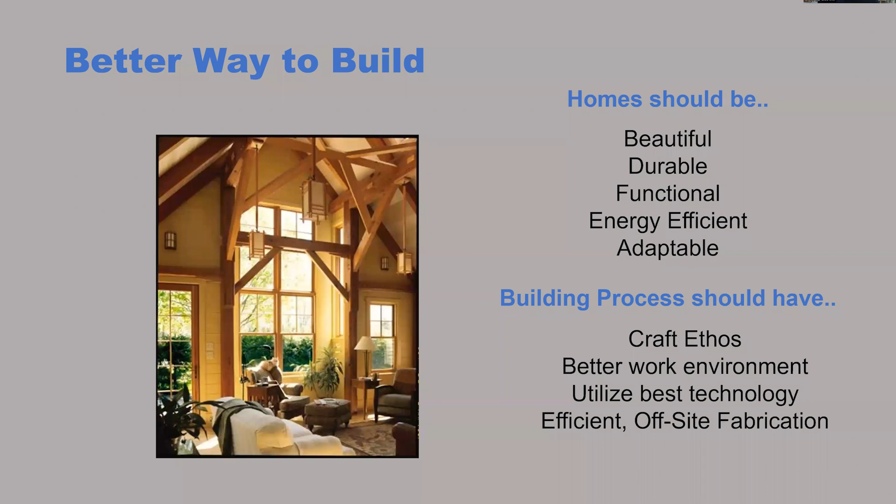Of course, the other part I was interested in is developing a process of building that would contain that craft ethos and a better work environment, and utilize good technology, focused on efficient off-site fabrication, as we were from the beginning. It was the practical way to approach timber framing.

But I ran into trouble in those early years of reviving timber framing, as we were calling it, because we had the task of developing new enclosure systems. The ones used in the houses in Walpole and Concord really couldn't work because they were infill systems between the timber structures, and that was not energy efficient or labor efficient. So we went about the task of creating new enclosure systems.

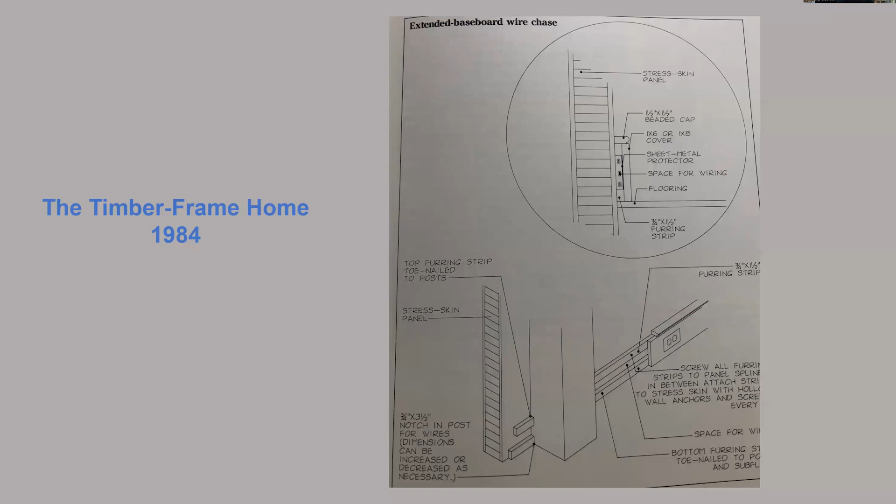So about this, this was in 1984. We got a little bit smarter about it. This little innovation happened on my own house, where there's an extended baseboard that is on the inside of the SIPS panel. That allowed the baseboard to be accessible, run on the inside. You could easily change outlets or add wires if you needed to, and it disentangled the wiring from the wall system, which was really, really important. It was a big innovation at the time, or it felt that way, and it was the beginning of being dedicated to the concept of disentanglement.

So in 1989, on my reading habit, I bumped into an amazing book called Supports, written by John Habraken. I hope you can get a copy. It's not always easy, you can get it from the MIT Press. I think it's still available. If it is, get it. It's one of those books where I think I underlined more than I didn't.

It was just incredibly illuminating, and it led to my getting in touch with John Habraken, who happened to have been the head of the architectural department at MIT for about 7 years, but he was still in Cambridge at the time when I discovered him. So I was able to go down and meet him. We became fast friends. It led to John giving several seminars to our company on open building and dimensional coordination, and changed us for sure. So I'm indebted to John.

And just, I think maybe a year later, or it might have been 2, Stewart Brand got in touch with me as he was writing and then finishing his book, How Buildings Learn. So I had the opportunity to communicate with Stewart during that process. And once again, there's another book that was just incredibly influential in our work, and the two overlap, and they relate to each other in a way that it's just amazing, and it led to many of the developments that we went on to pursue as a company, and I'll try to describe it.

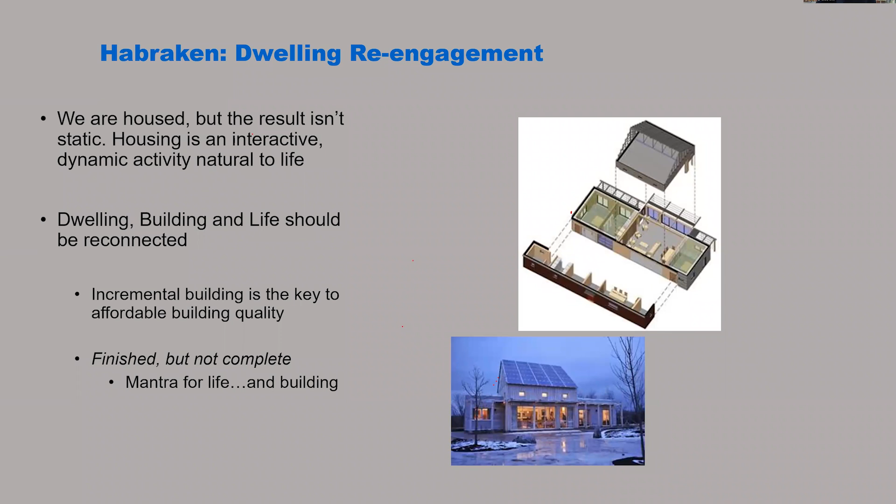So this is a Habraken principle of separating the shell from the infill. The shell is the longer term part of a building, and the infill is a shorter term part. But he makes the point that the shell is also the part where you want public control. There are regulations there, it needs long-term durability, and because it is a public proposition, the players should be architects, engineers, and public agencies that are helping to actually legislate the safety and durability of it. But the infill really should be private.

There should be more freedom there. It should be easy to change and modify. And the players impacting the infill part should be the inhabitants themselves, maybe interior designers, other semi-professionals who are helping the inhabitants keep up with the changes in their lives and personalize it for them, kind of make it their nest.

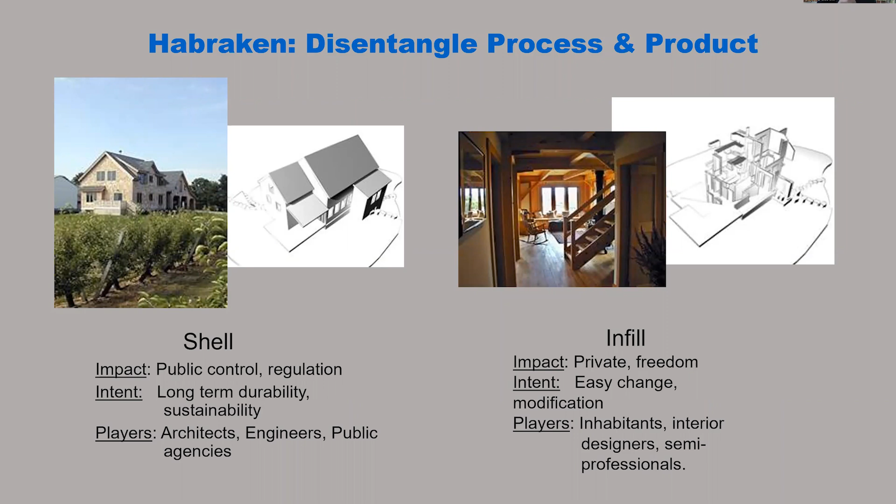So Brand, in his book, had this concept that is called the 6 S's. And the 6 S's are site, structure, skin, space plan, services, and stuff.

So the site is obviously geologic time, and things should last a very long time because the site is permanent. And therefore that work that we do as architects and designers of placing a house on the site is some of the most important work we do, because the site is permanent.

And the structure really should be, in a better world, always a 200 to 500 year proposition. And so that includes the foundation, the framework, and the engineering that makes it that solid.

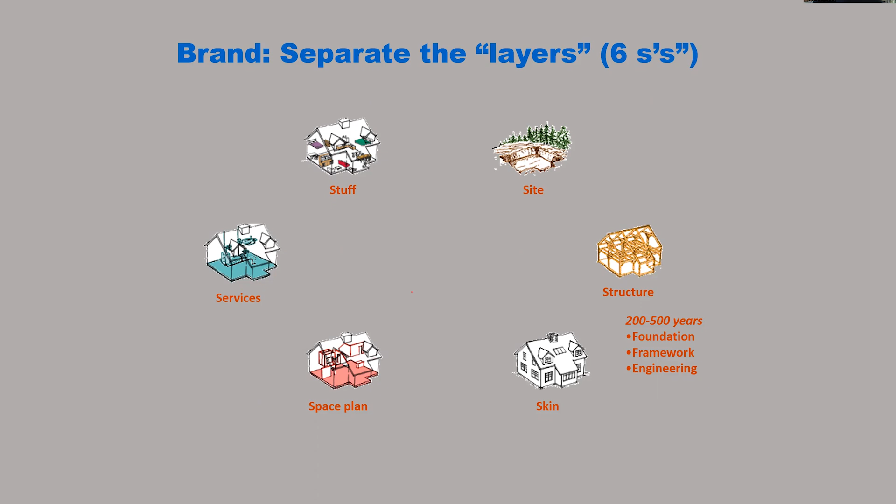The skin is shorter time, maybe 75 to 150 years. And there's building science involved with that: the roof, the walls, the windows and doors, the siding and the trim. I think we're doing better with rain screen siding to make that easily adaptable and changeable.

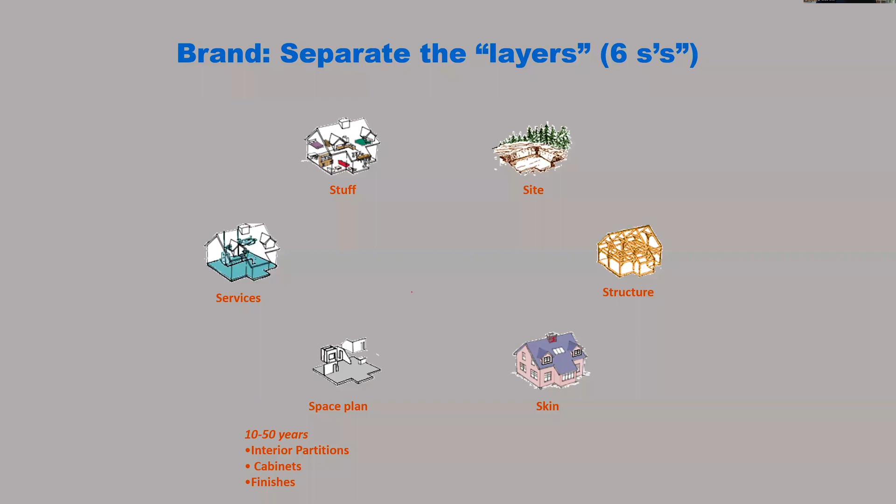And then the space plan, that's how the building is organized, is even a little bit shorter. Let's think of it as perhaps generational. So that's the interior partitions, the cabinets, and the finishes, with a shorter lifespan. And then services, we'll call this 1 to 10 years.

Plumbing, maybe the backbone is the drainage system, lasts longer of course, but the distribution changes when a bathroom changes or when a kitchen changes. So that's a shorter term thing. And the HVAC and electrical, network audio, those are all shorter term elements.

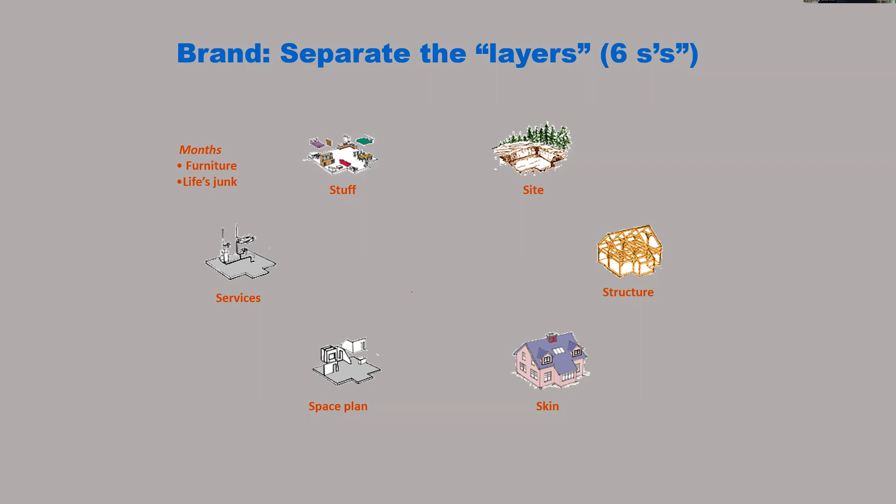And then we get down to stuff, furniture and life's junk that just changes, almost daily sometimes. So I love that concept. And so we put the two together, kind of Habraken's shell and infill and Stewart Brand's 6 S's, and push forward with that.

That's not a place where you should save money. And as builders, we've got to stop even saying this thing about my clients would rather have a granite countertop than more insulation. It doesn't matter. What they need is more insulation and better structure, because generations from now, that will matter, even if it doesn't matter to that first inhabitant. So that's just a paradigm that needs to be changed as soon as we can change it.

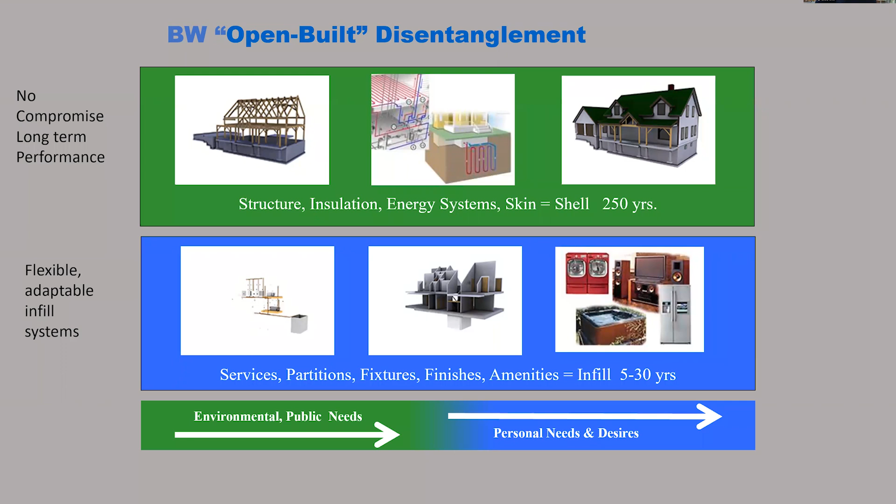And we have that should be personal and adaptable. And if we build the building right, we can accomplish those two sides, the shell and the infill, and then allow all those 6S systems to be disentangled and accessible from each other.

So how does it work in practice? Here's an actual project of ours, and our thinking about site and structure. Of course, this is us, so there's timber frame in there, and skin, and then space plan on top, and services and stuff, the furniture and so on.

If we think about that on the design side, we can develop strategies and systems to ensure that disentanglement is real. Because if we don't do that, if we entangle the services on the right-hand side with the structure on the left-hand side, then the life of the structure may be dependent on the life of the services. If we start cutting through structure to run pipes or ducts, you're halfway to demolishing the building by the time you get it built. We really shouldn't be doing that.

Think of having 110 voltage wiring in the middle of a high performance wall system. How adaptable is that? How changeable is that? And if we really expect that a building is going to last 250 years, that short-term wiring should never have gotten into that long-term structure system.

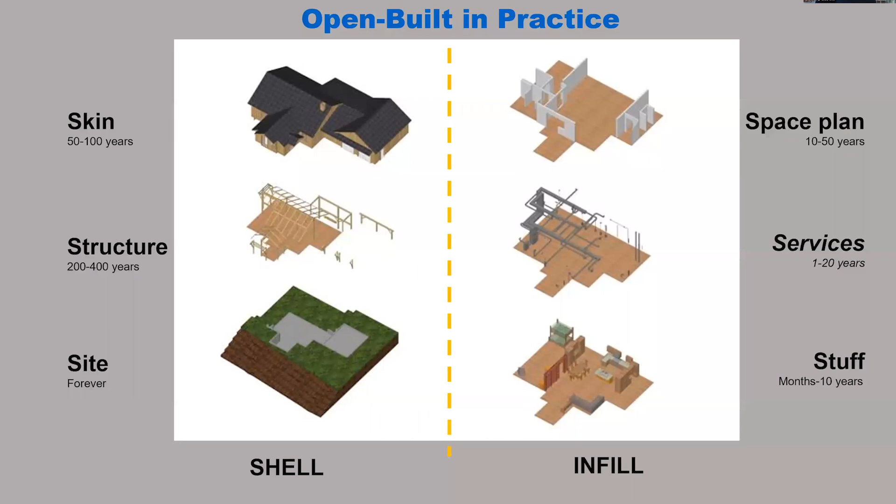So it's a principle that if you follow it and believe in it, solutions will come. We embarked on this path deliberately, with vigor, to develop the concept of how we could improve and develop systems for open-built disentanglement. It led to a series of projects we got involved with in order to do that.

I'll tell you about one or two of them. We developed a partnership with MIT for this purpose and some other partners, and that led to the open building prototype. We did two projects in that partnership, in 2006 and 2008.

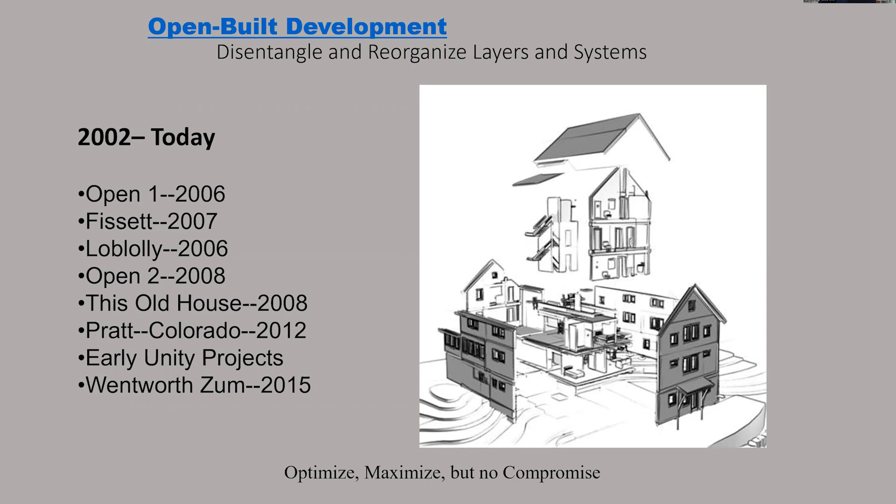We did the Loblolly House in 2006, a private house for a professor from UMass who believed in the vision too. In 2008, This Old House was another project that we pushed and pulled on our prototyping. Then the Wentworth Zum that we took to Greenbuild, most recently, in 2015, and a lot of prototyping in between. But as an example, here's one of the first prototype projects we did with MIT.

The project was actually a two-family halfway house in a brain injury rehabilitation center at Crotched Mountain. Given the clients, this building had to be extremely adaptable because the clients who lived in the halfway house were constantly changing with constantly changing needs. So the rooms actually had to be movable, and all the systems needed to be upgradable as needed.

Elements here that we developed: one was this mechanical core wall that had all of the intensive mechanical systems built into a central wall. The whole concept of this wall developed, or kind of redeveloped, from a similar concept that was developed in Germany. That whole core wall could actually be removed from the building and replaced with upgraded mechanical systems. It actually passes right through the center of the building and up into the roof system.

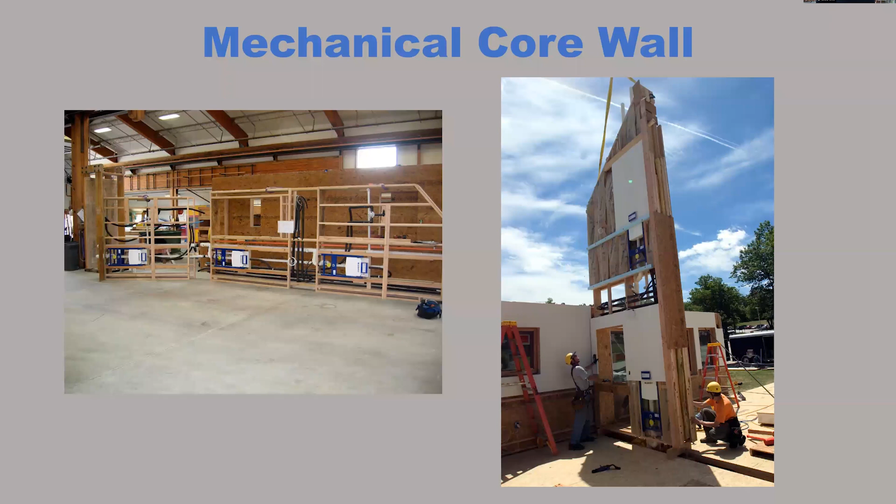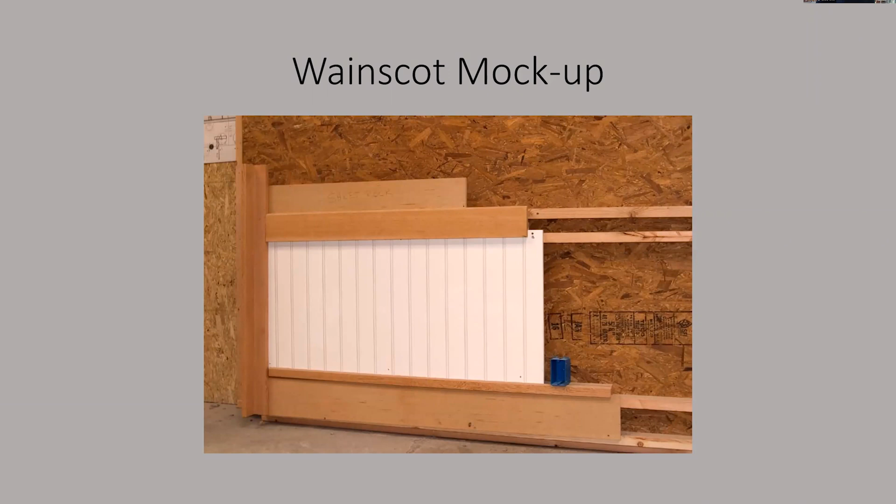We developed this wainscot system that has wiring behind it on several levels, and the wainscot is completely removable. There's that upper cap that you just pull off, and then the wainscot itself can be easily removed, exposing that entire space for changing the mechanical system.

We developed a demountable partition wall for that system, because all those partitions in that space needed to be able to be removed when necessary—not if necessary, because clients were changing.

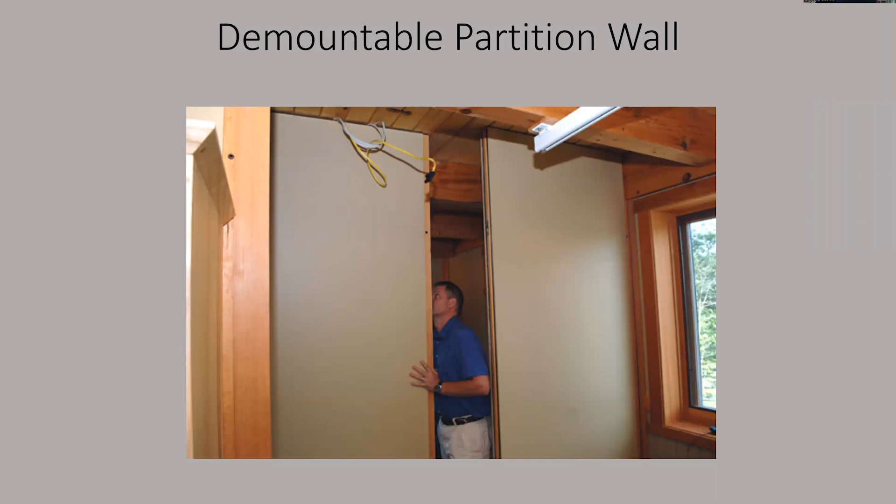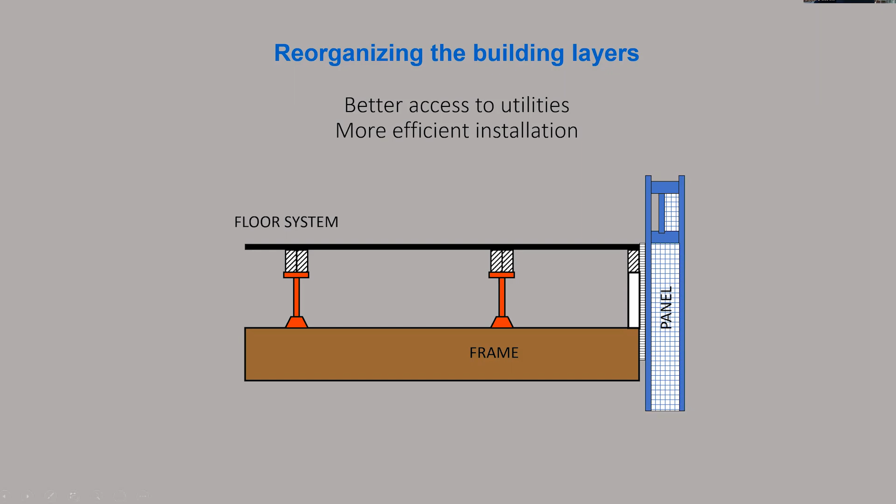We developed a floor system that could be placed kind of over a timber structure, and the floor system separated the mechanicals from the structure. All we had to do, once we had developed this—which was a brilliant system, by the way, and I take no credit for it other than arguing a lot, but it was developed by some good people in our company and continues to be developed today.

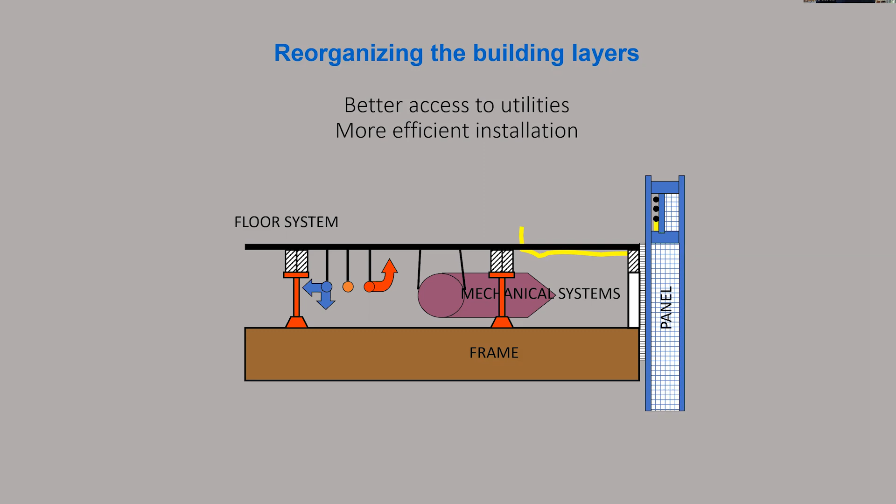With this system, you have open access to all the mechanical systems, ducts and pipes and wires. Here's ducts and a radiant heating system attached kind of in that floor system area. And then we developed a ceiling system.

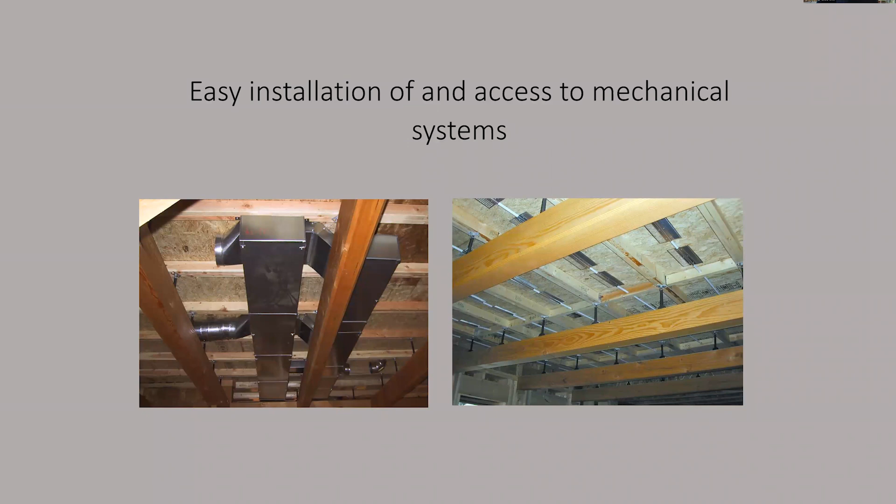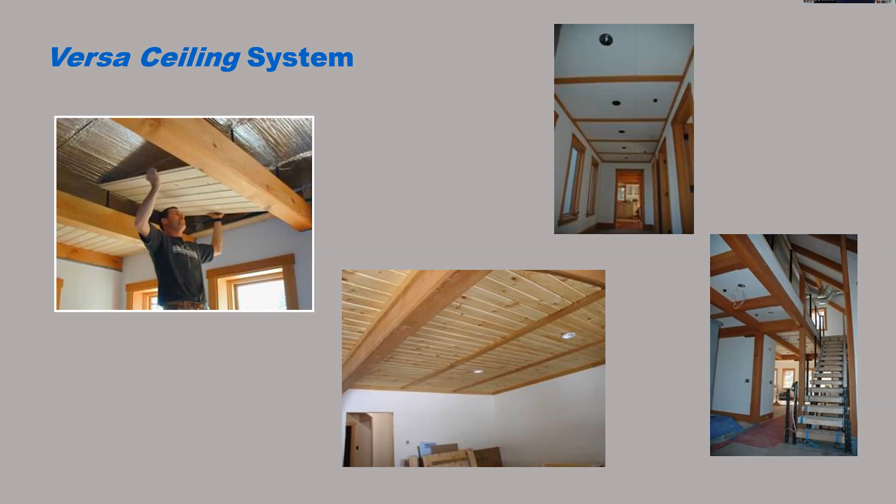We developed a ceiling system that was demountable. We just created these ceiling panels in our shop here, actually right behind me, and then we could take them out and install them kind of as a removable ceiling panel system over the timber structure. We've done that system in probably hundreds of houses, often with pine boards or something similar, but sometimes with MDF, as you see on the upper right there. It's a system we still use today, the Versa ceiling system.

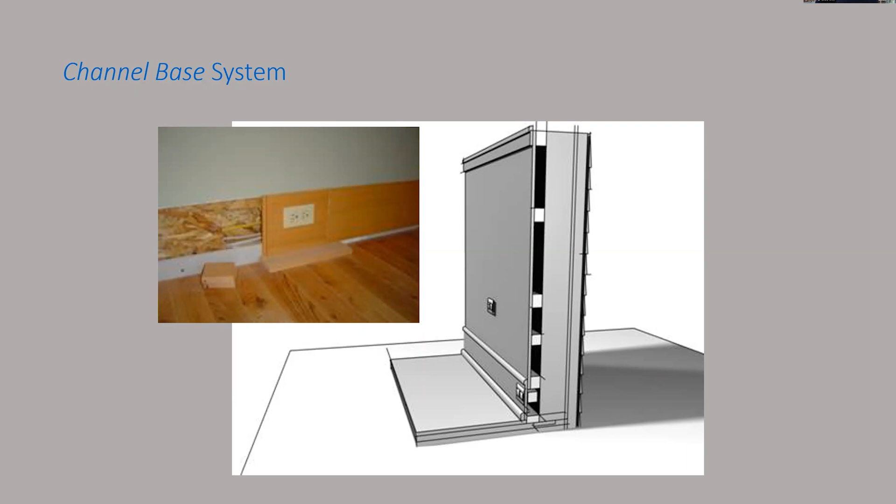And here's a channel base. We went on from the system that I developed in my own house to perfect a baseboard system that we've used in many, many houses. Part of the innovation is to ensure that baseboard is easily removable with a cap, and then separate elements for the outlet boxes, so you can move them easily. I have several of these in my house, and I've moved outlets to be closer to the lamp instead of extending cords further to the outlet. So there you can see that outlet box concept in a little more detail.

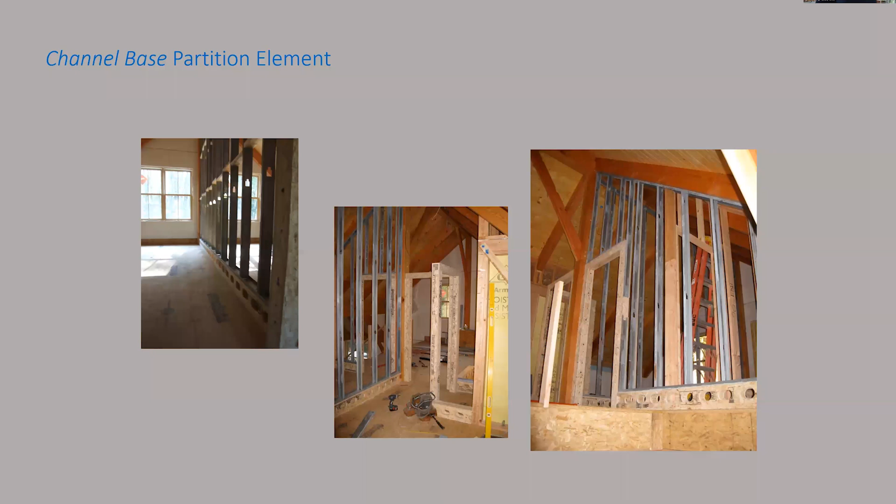For interior partitions, this is something we've experimented with. It hasn't become mainstream for us, but it's a base element we can use on our non-structural partitions, so we're able to run wires freely through that base element, up into switch boxes and outlets as necessary, while providing easy access to that base element.

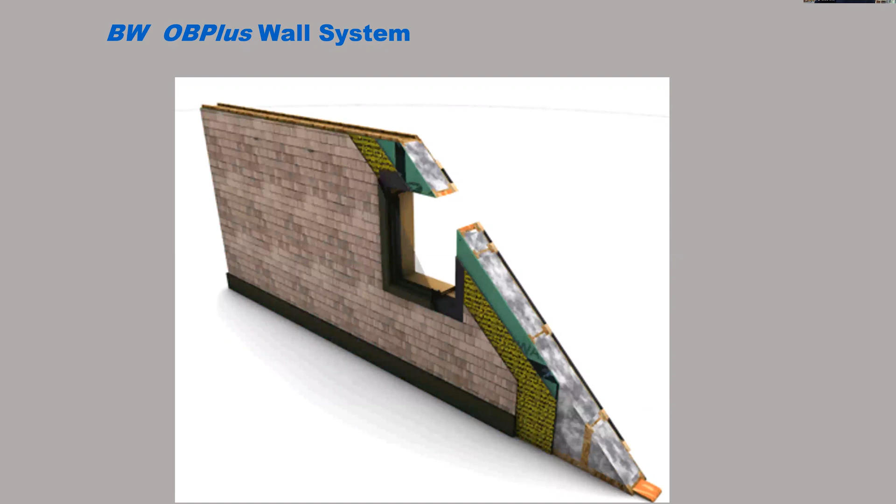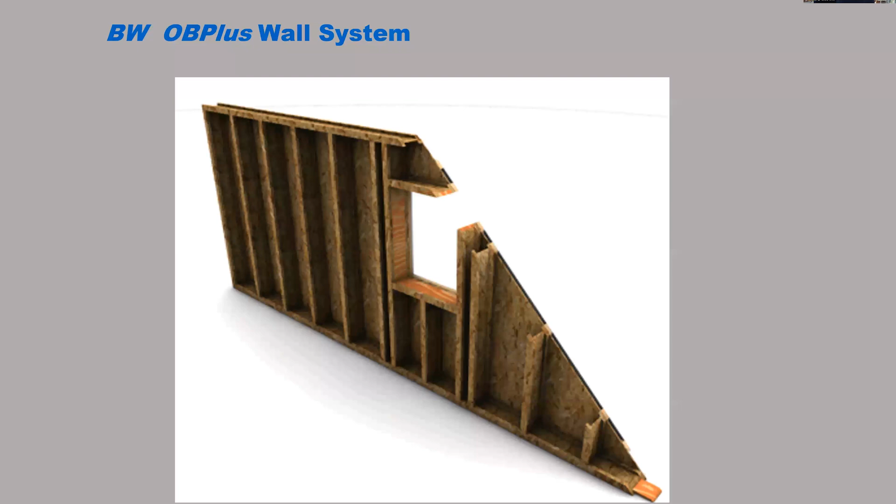In 2007 and '08, we developed what we call the OBPlus wall system. When we stopped using SIPs and developed our own wall system, one of the most important ingredients was ensuring we had a way to flexibly move wires and pipes. So there's a complete service layer in this wall system that's critical to how it functions. All the wall systems we offer today have that service area as part of the system, and it's really important. If these buildings are going to last a long time, and we've got R35s, R40, and R48 in the wall systems, to entangle it with services and wires is just a crime and would limit the life and durability of the building.

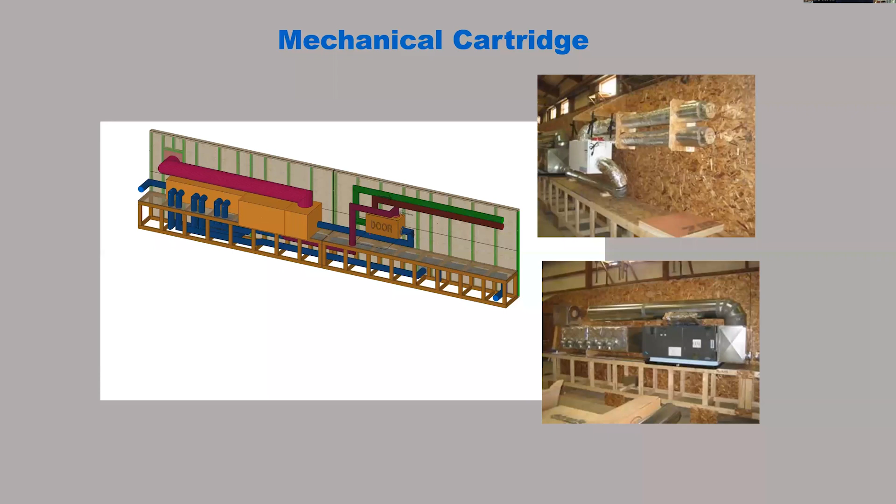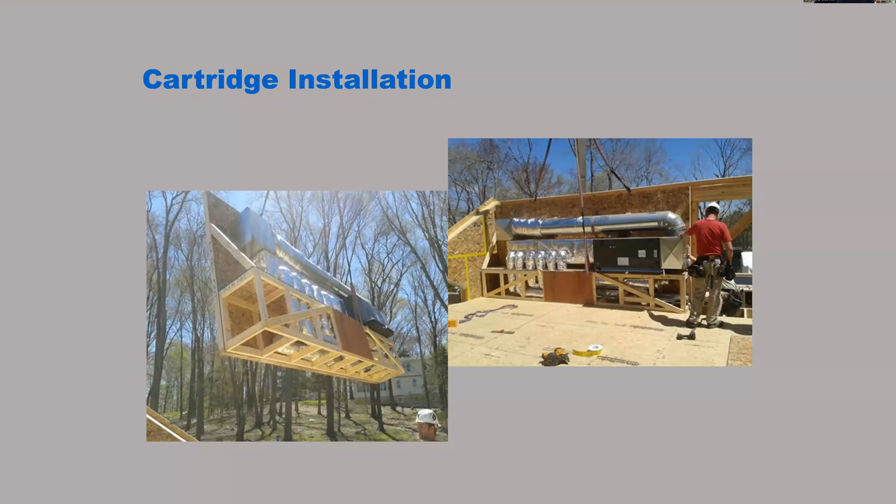Here's something else we've done, not on a regular basis, but more on a prototype basis. We've off-site built mechanical cartridges that can be installed separately, and therefore taken out separately — a more flexible system. It has to be put in the right place in the home to be that flexible, but we're doing that as we disentangle the services from the structure.

This kind of brings us up to date. We're working on a new kind of brand for the company, and we're developing a new ceiling panel. It'll function much the same way as our older ceiling panel, but with a different grid system so we can align the boards differently and have a continuous ceiling system, even though it's totally demountable and flexible.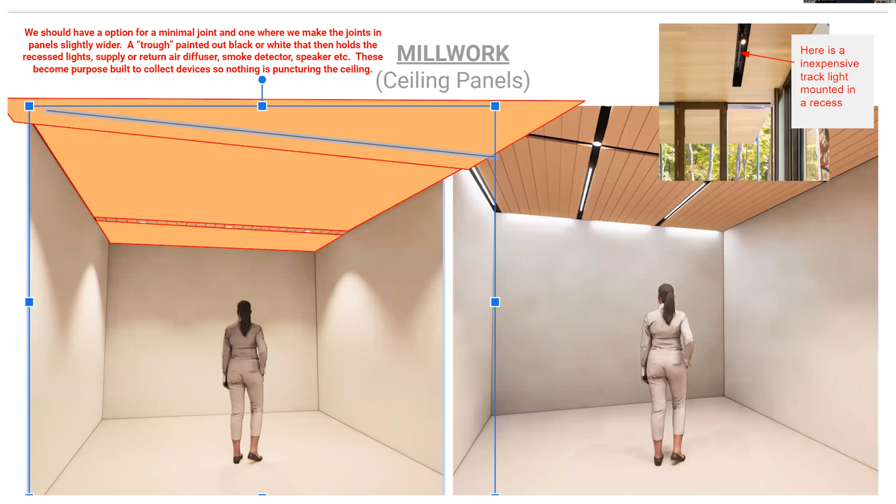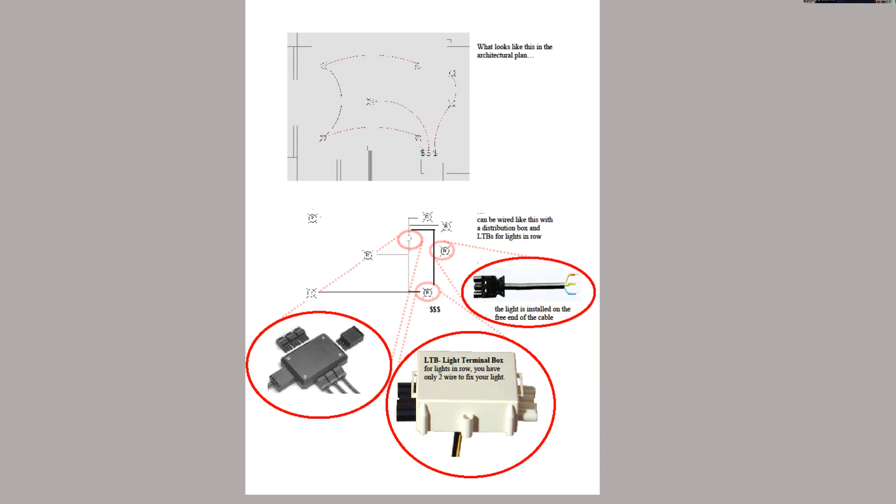And then I thought everyone would be interested in this. We've done a lot of experimenting with plug and play systems in plumbing and electrical. Unfortunately, the most flexible systems we've used and actually installed in buildings come from Germany, and they're not UL approved, but we live in New Hampshire where, you know, it's live free or die. So we've actually installed some of these systems, experimenting with the flexibility of a complete plug and play system. I do think this is going to come to our country, and we're right on the task of trying to develop a system like this that would allow us to distribute a complete electrical system that is plug and play and accessible — that's kind of the holy grail. So this system was in Open 1 because it was in New Hampshire and we could do that, and we've experimented with it on a couple of other projects.

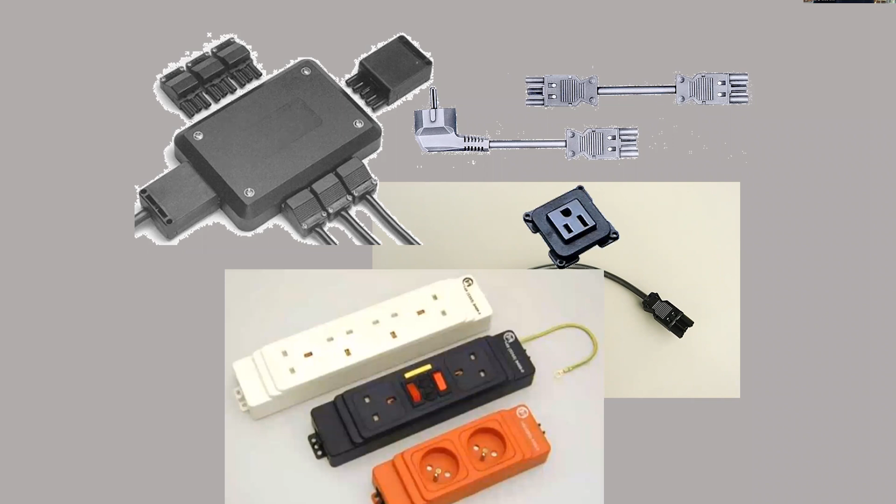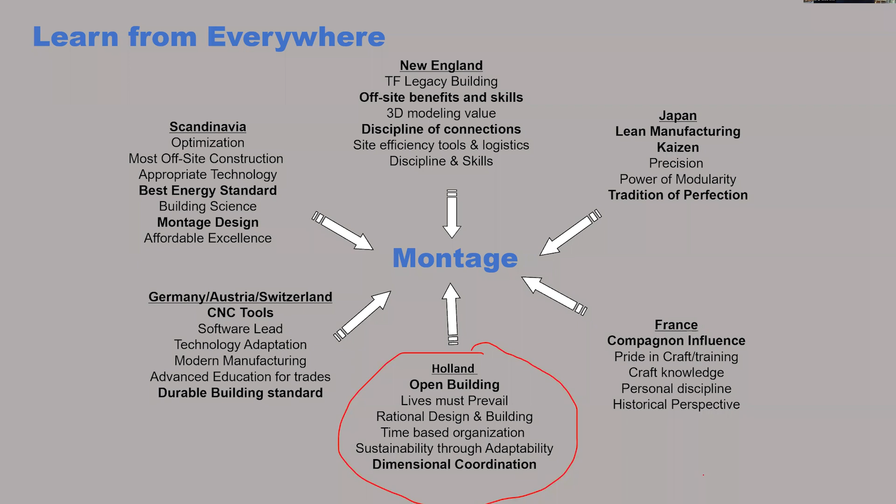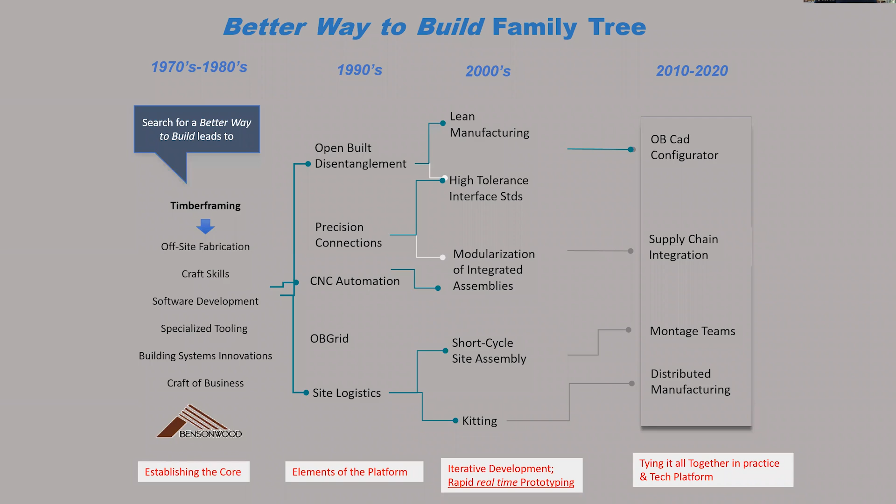So I want to thank everyone for listening, if you did and you're not gone. I realize that some of it is a little bit academic, but that academic part is really important, because it's not just about finding a way to build a better baseboard system that disentangles wires. It's really about rethinking the process and the product of buildings so that buildings can last longer, be more adaptable to people's lives, and be more responsible to our indebtedness to the planet for giving us the gift of life. So thank you for paying attention, if you did.